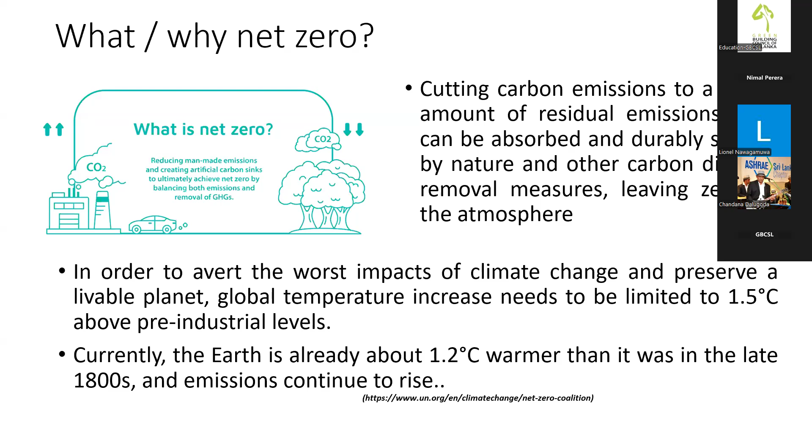That balanced condition is named net zero. Why are we talking about net zero? Because according to the Paris Agreement, related to the climate change sector, we can see the global temperature increase from the pre-industrial era, that is from 1850. The Paris Agreement hopes to limit the temperature increase to 1.5 degrees Celsius relevant to the pre-industrial era. But in 2024, we already passed that year, surpassing 1.6 degrees. That is a very dangerous part of this climate change.

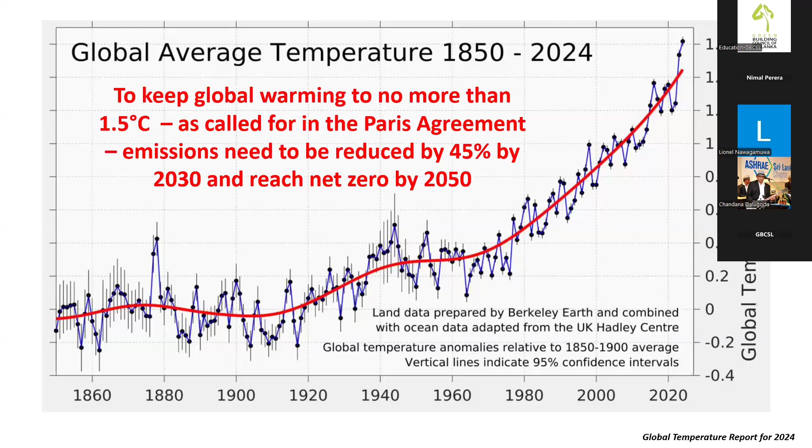Though we are talking about climate aspects, we are at a very detrimental point in terms of climate change, because the temperature around us has gone beyond the 1.5 pre-industrial era average limit. So we are still keeping some hope, especially on green hydrogen.

According to official figures, 2024 was the highest temperature ever recorded in the history of current civilization. According to my knowledge, in 2024 we were hearing that the highest temperature was recorded in 2023. Similarly, at the end of 2025, or maybe next year, we will hear the same thing - that 2025 was the highest temperature ever recorded. So the final thing is this is continuously increasing.

I'm trying to discuss a kind of solution for this, which is basically nothing other than green hydrogen. When you talk about hydrogen, I don't want to take much time explaining - hydrogen is the lightest atom in the periodic table, which we learn in O levels, A levels, and even lower classes. It was first recognized by Henry Cavendish in 1766 and so on.

There are so many stories behind hydrogen. When you talk about hydrogen, it has three isotopes, namely protium, deuterium, and tritium. Deuterium and tritium are isotopes of hydrogen, but we are very much keen on the one called protium.

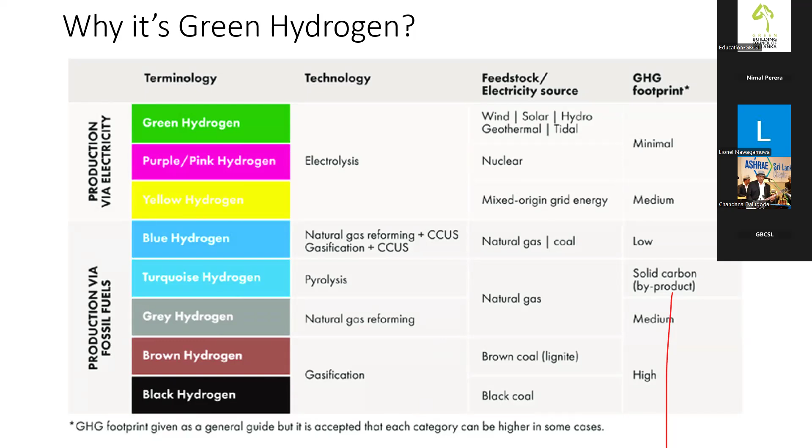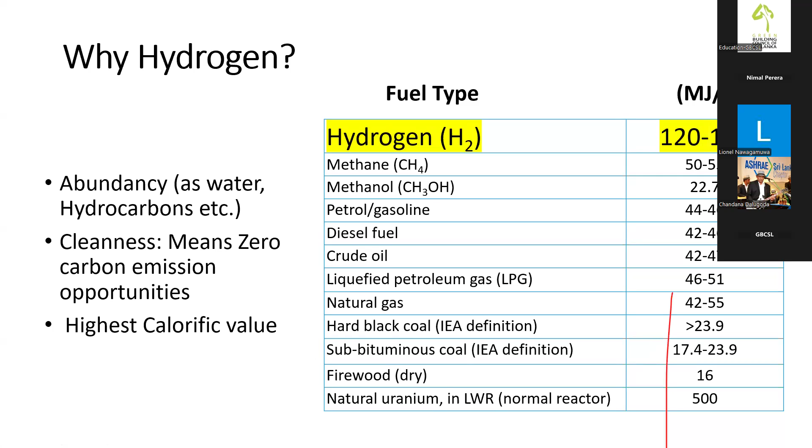So therefore, we can think about that particular hydrogen. If we can produce this hydrogen with minimal impact to the environment, that would be considered one of the best solutions.

All these fuel types have a lower energy calorific value than hydrogen. So that is one factor. On the other hand, green hydrogen is clean - it means zero carbon emission is happening if you burn this particular fuel.

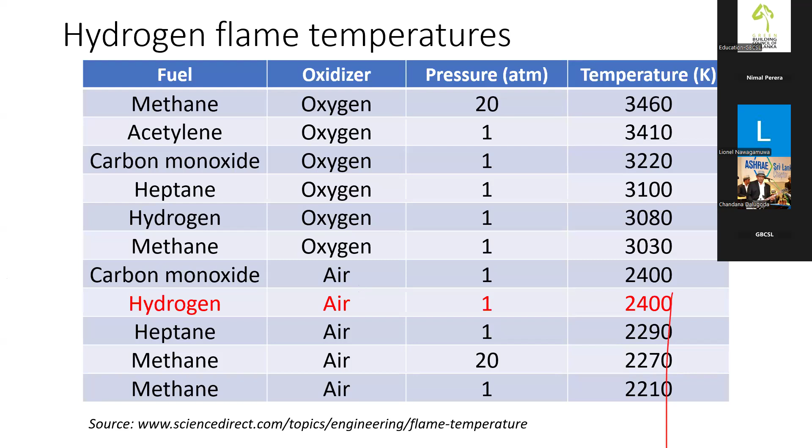It's the best source for our economic development. If you go through the historical evidences, you can remember we were using this in our school days, when we were children. We used to use caustic soda and aluminium foils to generate hydrogen, which is called chemical hydrogen, and fill it into balloons and float it. So that's what we know from history.

But other than that, there are several usages of this fuel. Currently, most spacecraft are using hydrogen, especially liquid hydrogen, as a fuel. In certain cases we are using it as a welding fuel, nitrogen fertilizer, food industry, and a wide spectrum of other usages we can discuss today, including the power sector.

We normally name hydrogen - it is not a source of energy, it is an energy vector, but you can use hydrogen for the purpose of energy storage. So that is a very important factor. Also, this hydrogen we can use as a fuel through direct combustion in direct combustion engines.

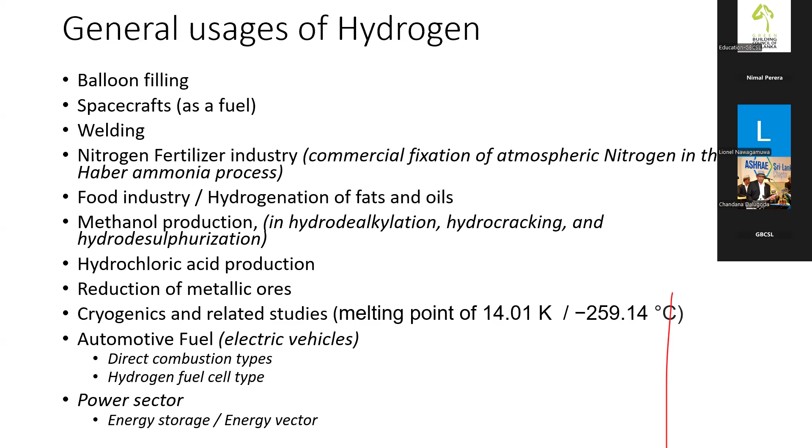So then, hydrogen, green hydrogen, and renewable energy are linked together, right? We can only produce green hydrogen with the supply of green energy or renewable energy. So that is the most important thing we always have to keep in mind.

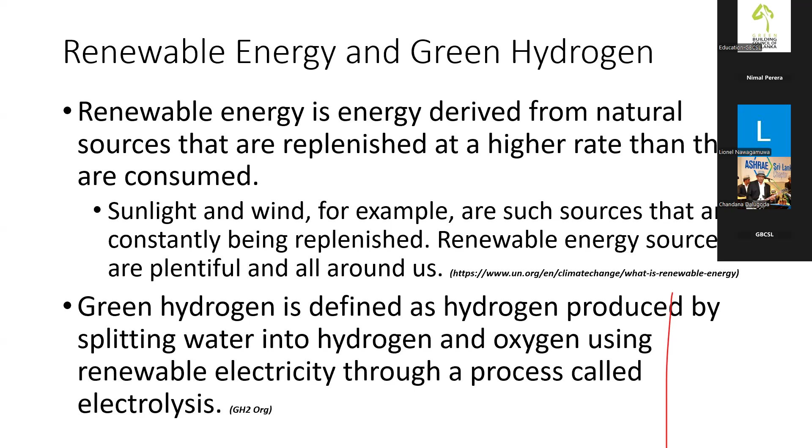Green hydrogen is defined as hydrogen produced by splitting water into hydrogen and oxygen using renewable electricity, through a process called electrolysis. So that's the most important definition about green hydrogen.

And of course, if you think about global carbon dioxide emissions, nearly about 74% of the emissions are coming from energy use in industry, or domestic, or transport sector - altogether there is a summation of 73.2%. Now, if we can make a mechanism to reduce this amount, to nullify this energy use and its resulting carbon dioxide emission - the main source of this energy sector responsible for this 73.2% energy use is fossil fuel, because we have to burn fossil fuels to use that energy.

So if we can find a mechanism to replace fossil fuels from this particular source of energy, definitely we can reduce this amount of emissions in the environment.

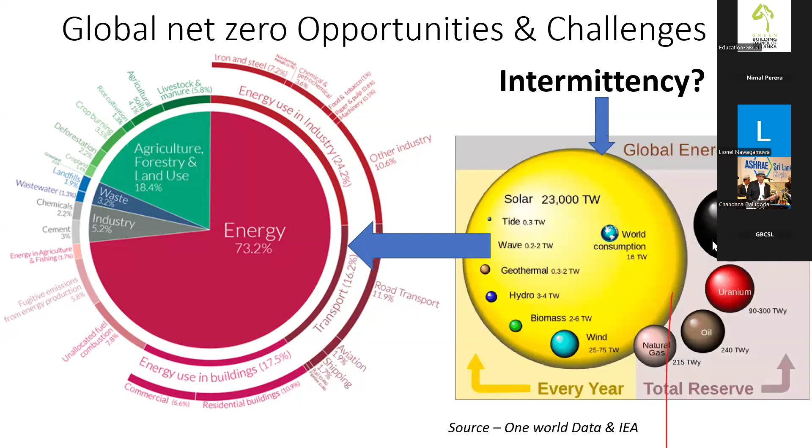Having that idea in our minds, we will think about the versatility of green hydrogen. But rather than green hydrogen, first we will think about green or grid renewable energy, because we are capturing renewable energy through solar or wind or other sources, and then feeding it to the national grid. The national grid can be connected to various industries, the transport sector, or the domestic sector, and we can use it only for electricity or power supply, if we have that scope.

But in the meantime, we are very seriously talking about renewable energy storage with batteries. Batteries - for what purpose can we use them? Maybe for transport, or grid balancing, or sometimes for very narrow purposes, but not very strong ones. Maybe as a backup source we can use these batteries. These batteries are charged with renewable energy.

On the other hand, we can think of the subject called pump storages. When there is an excess amount of renewable energy in the grid, we can use that excess energy to pump water from lower levels to upper levels, and grid balancing and storage can be done with these pump storages as well.

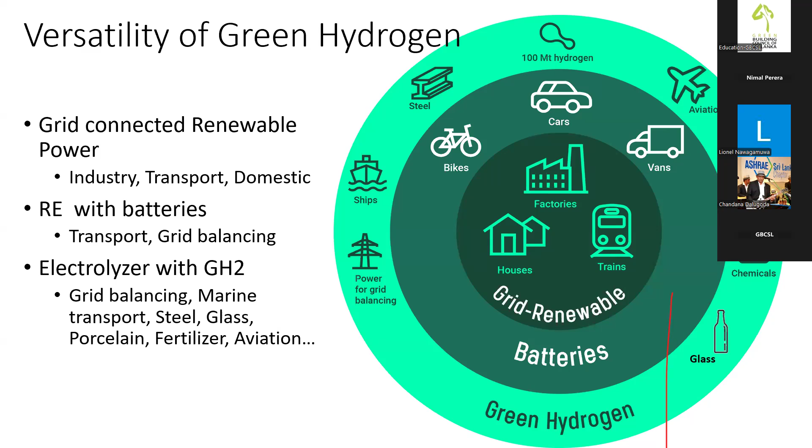But if we can apply this additional electricity through electrolysis, and generate green hydrogen, then we have a number of purposes like grid balancing, marine transport, steel production, glass production, porcelain, fertilizer, aviation, and likewise a number of processes we can address. So it's worthwhile to talk about green hydrogen, which is why I said this is a very versatile element.

Renewable energy is intermittent, as I mentioned earlier, with solar and wind power generation. I'm sure you remember the dark experiences we had in our country because of grid imbalance situations.

All these things could reasonably be addressed with this subject called green hydrogen generation. This variability can ultimately create frequency or voltage instabilities, grid congestion, and curtailment.

Sometimes we have to curtail the generation. That's why the utility sometimes says switch off all the rooftops, or the renewable power generation or solar power generation systems during a particular period.

So if we are ready with green hydrogen generation facilities and the electrolyzer system, we could definitely use this mechanism to generate green hydrogen. This could be used for further powering the nation, to generate power, and at the same time used for various other multi-purposes, which we can discuss in my next slides.

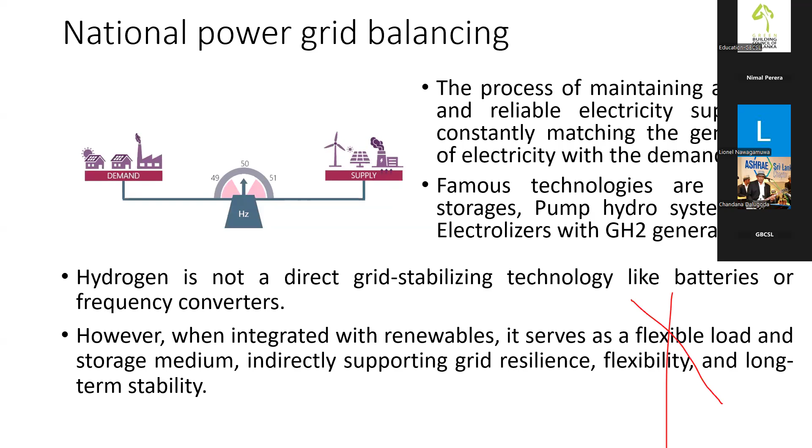National power grid balancing is normally the subject connected with electrolyzers, green hydrogen, and renewable energy, which I'm not going to elaborate on much more because I'm sure you have already received some understanding.

The real world application - somebody would ask me, are any other countries using this electrolysis mechanism and green hydrogen generation for the purpose of grid balancing? Yes, in fact I have already visited one of these places in Germany. I saw how they are balancing their grid at higher levels of renewable generation.

When there are higher levels of renewable additions to the national grid in Germany, especially in the northern side grids of Germany, they start their electrolyzers and generate green hydrogen. That green hydrogen they capture and mix with their natural gas grid or natural gas pipelines. With that, they increase the calorific value of this particular energy source, the thermal source, and they receive the benefit.

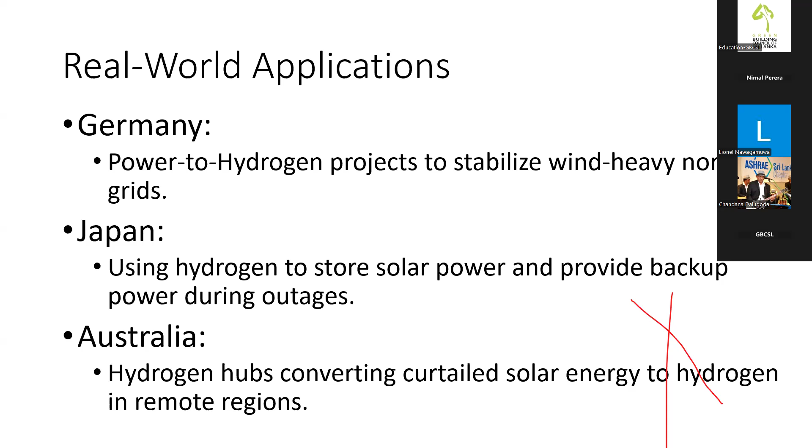These are very preliminary studies we have done so far, but the detailed studies have not yet been done. With detailed technical and economic studies, we can move ahead and decide where we are going to connect this grid balancing equipment for the electrolyzers.

But we have to consider the following aspects before going for implementation: the grid capacity - we need some idea whether the infrastructure can handle the additional loads from the electrolyzer, because connecting the electrolyzer may create additional loads. And of course we have to think about water availability, because water is one of the critical factors when we are talking about electrolysis.

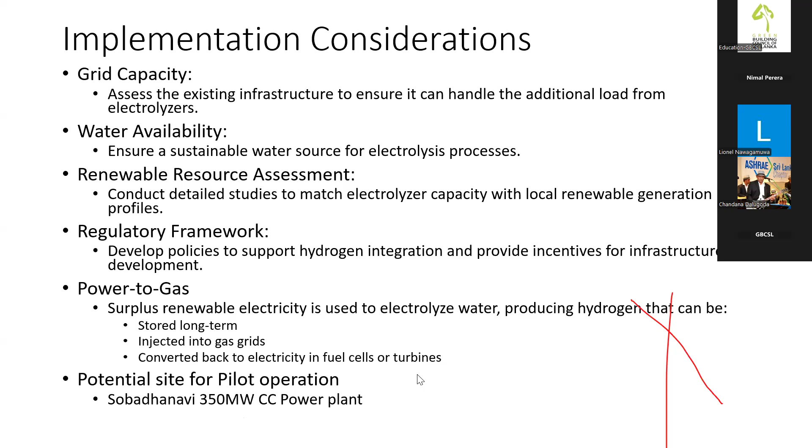For power to gas, surplus renewable electricity - where are we going to use it? Either we store it for a long time, since we don't have a natural gas grid, but hope at least by 2028 or 2030 we will have a limited natural gas grid. So are we going to mix this hydrogen into it, or convert it back to electricity using fuel cells or maybe turbines? The potential site for pilot operations is, of course, the Sobadhanavi 350 megawatt combined cycle power plant, which is available at the moment.

And then there's green hydrogen in the transport industry. There are two technologies we can think about: combustion technology or fuel cell technology. Fuel cell technology has a very long history. I remember in 2012 or 2013, I had the experience of traveling in a fuel cell operated bus in Korea. During that time, they were already doing research on this subject.

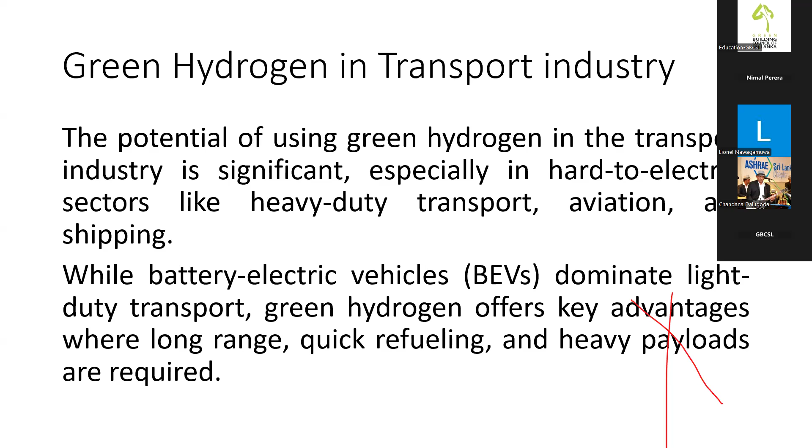What are the key transport sectors we can focus on, coupled with the high potential of green hydrogen? The heavy-duty transport sector definitely has assured opportunities to use green hydrogen - especially trucks, buses, and long-haul freight transport systems. Why are we so interested in hydrogen? Compared with battery technology, it has much faster refueling than battery electric vehicles, and the range is nearly 1,000 kilometers compared with battery technologies.

Also, if you compare the weight of a battery bank with a hydrogen storage tank, it's much lighter. In several countries like Hyundai in Europe, Toyota, and a number of other industries, they have already come to the scene with their technologies to use green hydrogen in their automotive systems. The two leading organizations are Hyundai and Toyota.

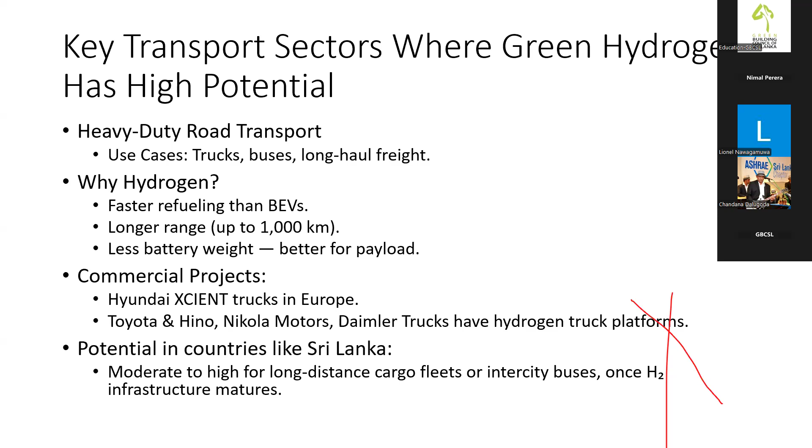And of course, trains are also very feasible. You may remember, a long time back in 2009 or so, one French company already introduced the train called Coradia iLint, a hydrogen powered train operating in Germany, France, and Italy. In Germany, the system has already stopped because of several reasons - one was cost, and the other was unavailability of the supply chain. But now they are again planning to bring the operation back with improvements to their supply chain, and quite rapidly.

You may remember when solar panels were first introduced to the market, they were very expensive, but now they are very cheap. Similarly, electrolyzers are also becoming much cheaper in the market rapidly. For Sri Lanka, the bus fleet could use hydrogen, especially in air polluted areas like Colombo.

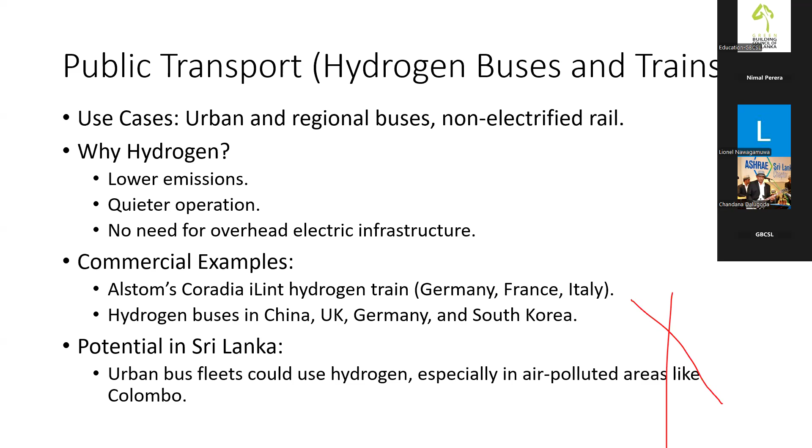This also has very high potential in maritime transport as well. A number of countries have already started pilot projects and some commercial operations. It's a very good source for, on one hand, economic mode of transport, and on the other hand, a very good source for decarbonization in the transport industry. In Japan especially, they have already started commercial projects with hydrogen-based maritime transport.

Even in Sri Lanka, we have a lot of opportunities, especially for hydrogen-powered harbor craft, tugs, or green ports. If we could convert our harbor operations to a green fleet of ships, or maritime equipment, what sort of green service could we offer to all the ships coming from various parts of the world, especially shipping fleets from the European side? They are very seriously looking for green supply systems to operate their maritime fleets. Therefore, we have a lot of opportunities in the maritime sector.

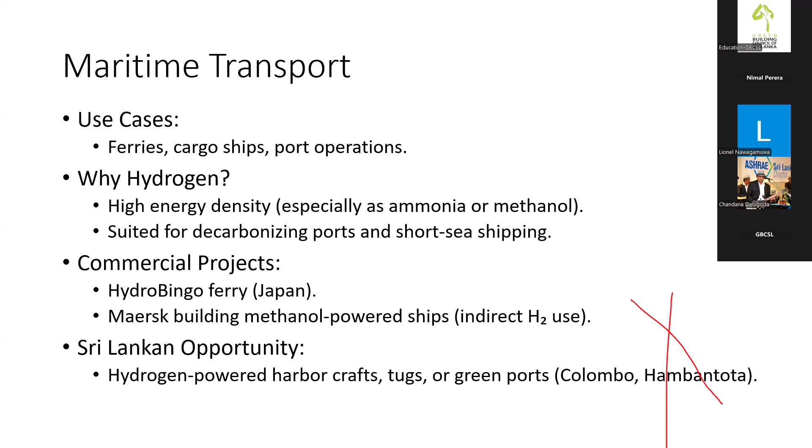Aviation, of course, mostly they are on the pilot stages, but the various aircraft operators are in the phase of pilot operations, and they will very soon start rolling their systems. Most likely by post 2030, there will be flights operating with green hydrogen.

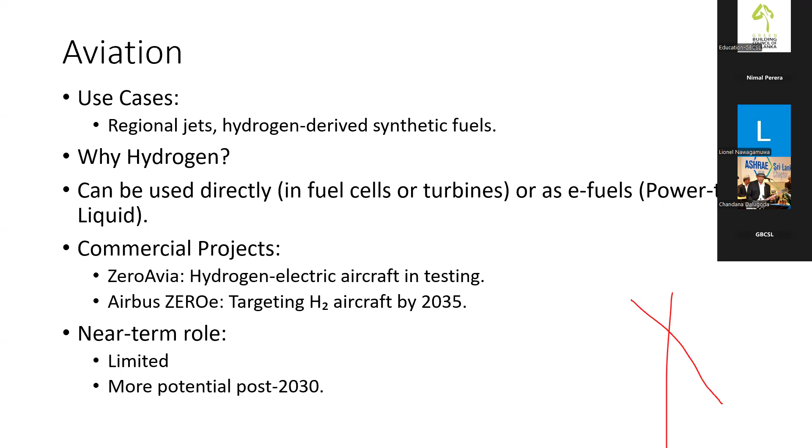So if you do a very simple technological comparison, hydrogen versus battery - the refueling time in hydrogen is in the range of minutes, but battery electric charging may be about hours. The range is between 1,000 kilometers and maybe 100 to 500 kilometers per charge. And the weight impact is very small in the case of hydrogen compared to the heavy battery pack weight in battery electric equipment.

The infrastructure is emerging, especially for hydrogen. It's in the pipeline, but most of the infrastructure for battery electrics is already developed. Though it is not very much available in Sri Lanka, in other countries it's available.

The efficiency is nearly 40 to 60% in the case of hydrogen through fuel cell operation. Battery electric will be 80 to 90%. But now slowly and steadily, this efficiency is improving in the hydrogen sector as well.

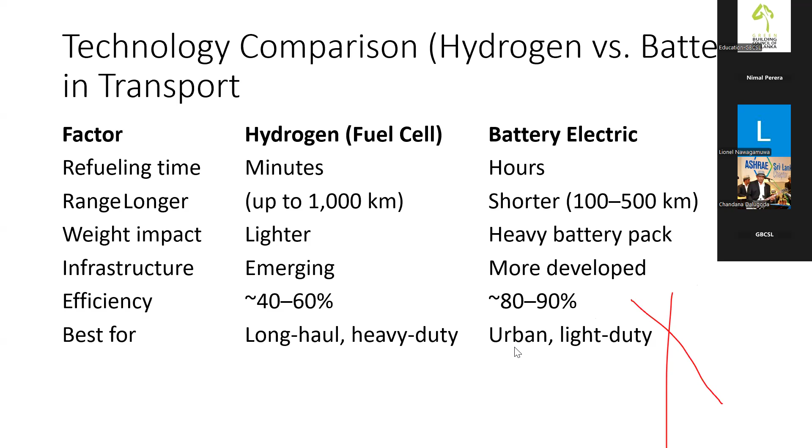Especially hydrogen systems are very suitable for long hauling or heavy duty, and battery electrics are better for urban and light duty automobiles or vehicles.

What are the potentials for Sri Lanka? Of course, in long distance trucks like container carriers, the potential is very high. So the condition is we need hydrogen stations. We have to start promoting the generation of green hydrogen and also establishing hydrogen supply stations at least next to the main corridors.

Intercity public buses, the potential is very high with hydrogen. But for three-wheelers or tuk-tuks or taxis, the potential is very low. So battery electric vehicles are best for the small vehicles like two-wheelers or three-wheelers.

Shipping - handling from the ports has medium potential. Rail has low to medium potential. And aviation, of course, is a long-term story which we have to study over a long period.

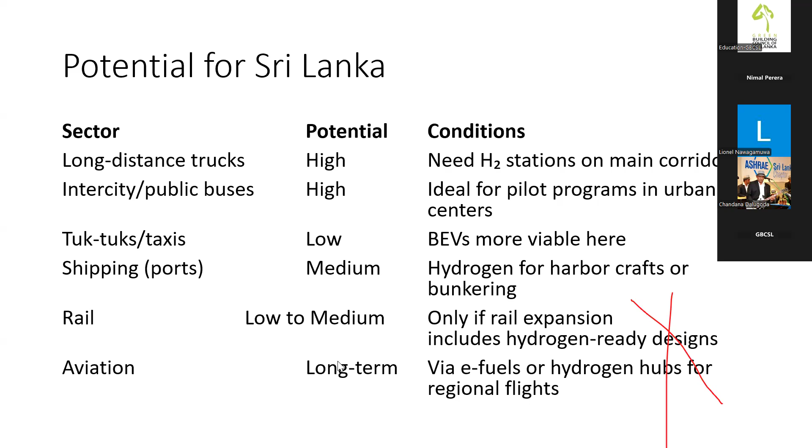And of course, we were dreaming about this railway electrification for a number of years - from 1970, according to my mind, we are planning to go for railway electrification. But still, we have not developed at least 1 kilometer, or even 1 meter, of electrified railway.

So during the electrification process, we have to consider two areas. We have two potentials, either overhead electrification or the application of a third rail, as given in the right-hand diagram, the picture. But both cases - the first one is a little bit costly for Sri Lanka, and the other one is basically not very socially friendly.

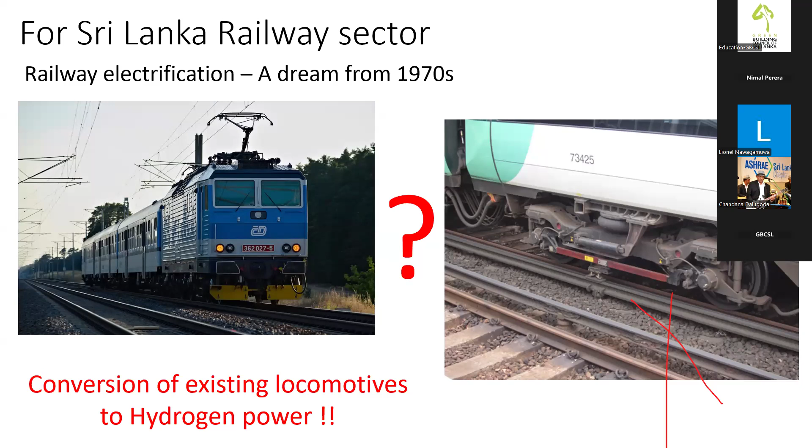So it's worth launching an R&D process to convert at least existing locomotives to hydrogen power. It's a good area which we can think about.

Metal industry, like steel production. Though we don't have primary steel production from iron ore to steel here, we have secondary metal processing or steel processing, which we can think about as a source of heat - we can think about hydrogen.

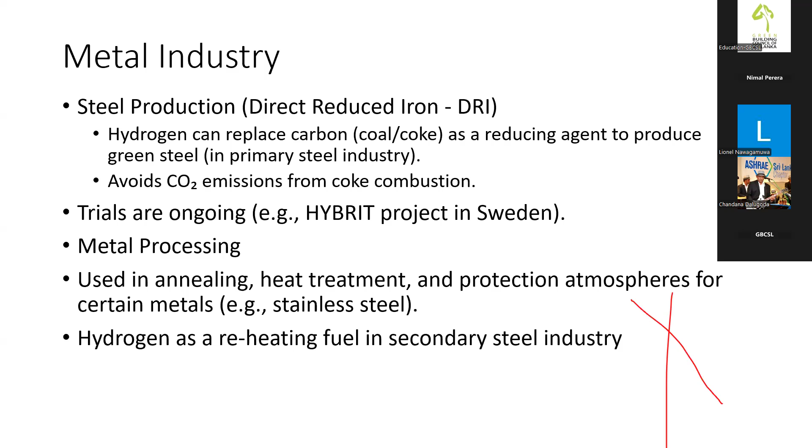And then there are proven operations in the world, in Sweden and also in Germany. They have already come up with proven results to produce steel with green hydrogen.

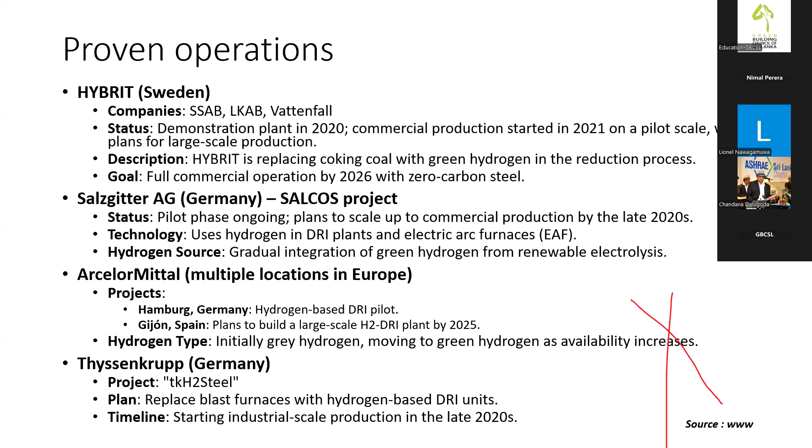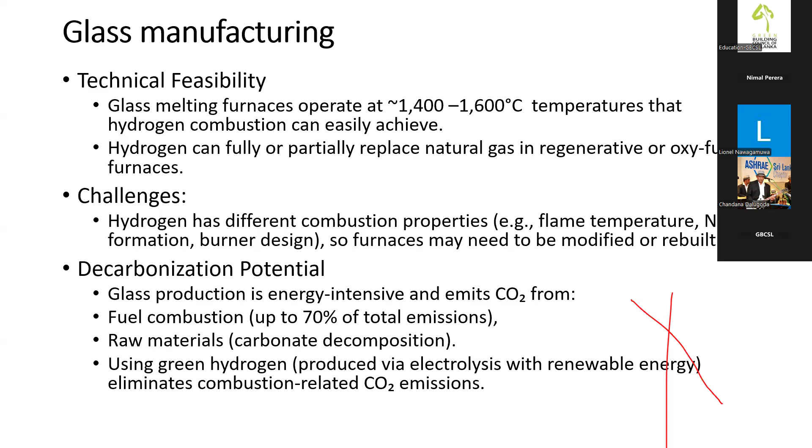According to the information, vodka bottle manufacturers have already converted their system - not the liquid or the alcohol, but the glass bottle - they are producing using green hydrogen.

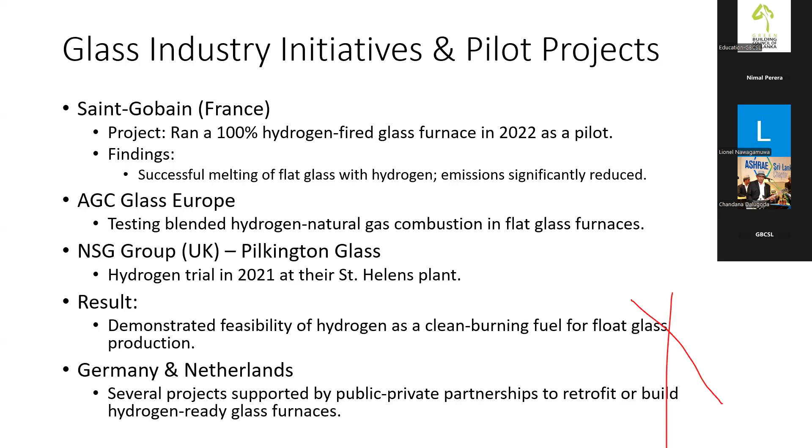There are certain technical considerations like flame temperatures. Of course, when you burn hydrogen, it will automatically generate NOx emissions because of the high temperature combustion. The energy density of green hydrogen has to be taken into account because it has lower energy by volume, which may require more fuel inputs to improve the burners. So in these cases, whether glass, steel, or whatever the commodity, you have to take special precautions and do research and development before getting into this operation.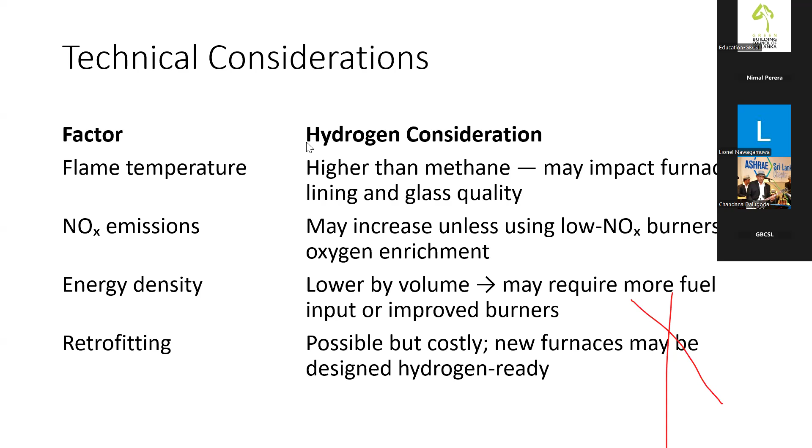There's the redesigning of the gas burners used in current industries. So when you're retrofitting from one to the other, especially retrofitting from fossil fuels, we have to be very careful. We have to think about the furnace lining also, because of the temperature and other changes.

Cement industry is also another area which we can think about, which needs a certain level of R&D. These are the best R&Ds where students can undertake lab scale work, with the possibility of extending to commercial scale production in the country.

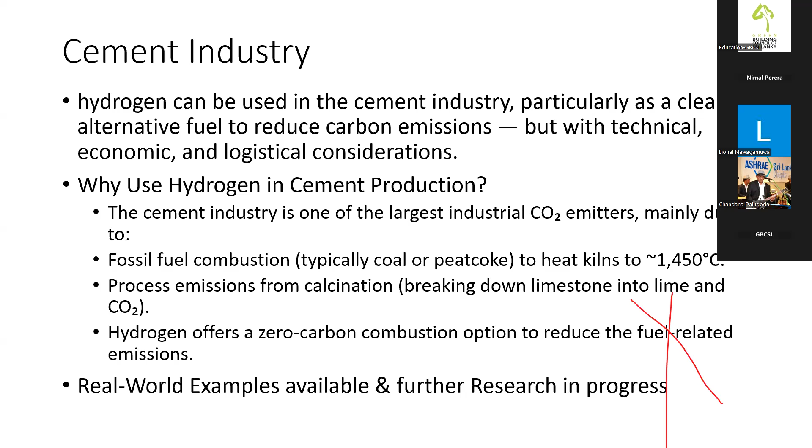In the cement industry, there are possibilities. If we can think about green cement in the future, that will be the best opportunity for Sri Lanka. Sri Lanka's cement industry could explore hydrogen to reduce dependence on imported fossil fuels, because currently we are heavily depending on fossil fuels - we have only one composite cement factory in Sri Lanka currently. If that one, operating on coal, can switch from coal to green hydrogen, that will be a great achievement, aligned with green industrial development and carbon market mechanisms, with added benefits.

We can integrate with renewable energy growth, especially solar and electrolysis for local hydrogen production, rather than centralized. If we can think about localized or decentralized hydrogen production, that's also one area to consider - positioning for green cement, as I've already explained. If we can think about green cement with green buildings, that would be a top advantage for the country.

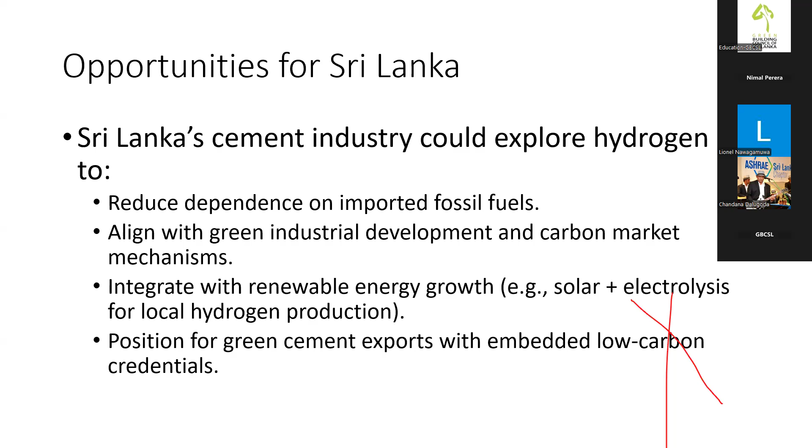The porcelain, ceramic, and tile industry also heavily depends on fossil fuels. They use huge amounts of fossil fuel because they have to achieve temperatures of sometimes 1200 or 1,400 degrees Celsius, where they currently mostly obtain heat from fossil fuels like LPG, kerosene, or industrial diesel.

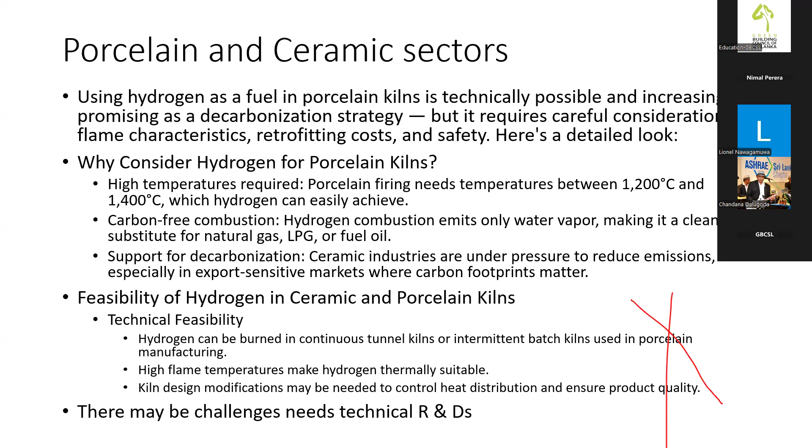So if those kilns and high temperature furnaces can switch to hydrogen, or at least start from the blending level rather than just retrofitting from A to B, why can't we think about starting with small percentages of blending with green hydrogen, then slowly increasing the blended percentage, which will have substantial benefits in decarbonizing as well as economic benefit. But of course, we have to get the green hydrogen supply chains ready before jumping into these technologies.

As I mentioned, Sri Lanka has a very significant export industry benefiting from this particular sector. I have been to a number of porcelain industries in Sri Lanka - they are suffering mainly because of heavy fuel costs, as well as export barriers, sometimes facing issues in their marketing and supply chains because of the brown nature of these products.

Because they use huge amounts of fossil fuels, the carbon footprint connected with these products is already very high. If we can start thinking very seriously on this subject - retrofitting or partial replacement of fossil fuel with green hydrogen - because green hydrogen production's main raw material, the feedstock, is basically renewable energy, which is amply available in our country. The only thing is we have to plan it very well - where we generate it, how we collect it, how we store it, how we distribute it, and where to use this valuable commodity.

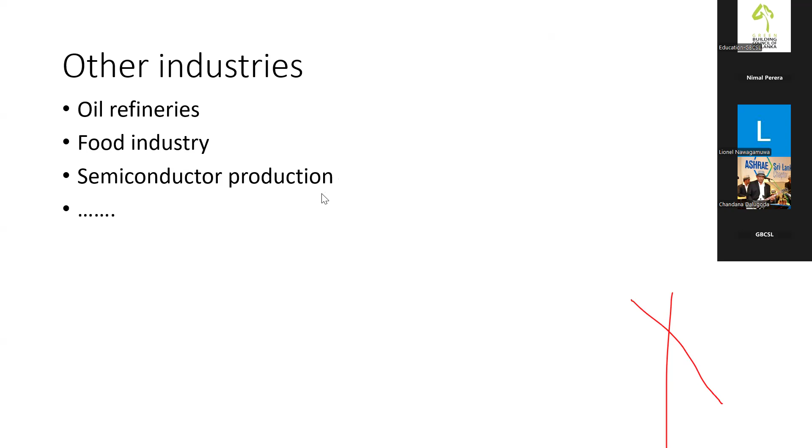In the meantime, we can plan for a set of microgrids, either on-grid or off-grid. With the input of water, we can split the water and deliver hydrogen. We can think about exporting hydrogen, or derivatives of hydrogen like ammonia, to the region or to the world.

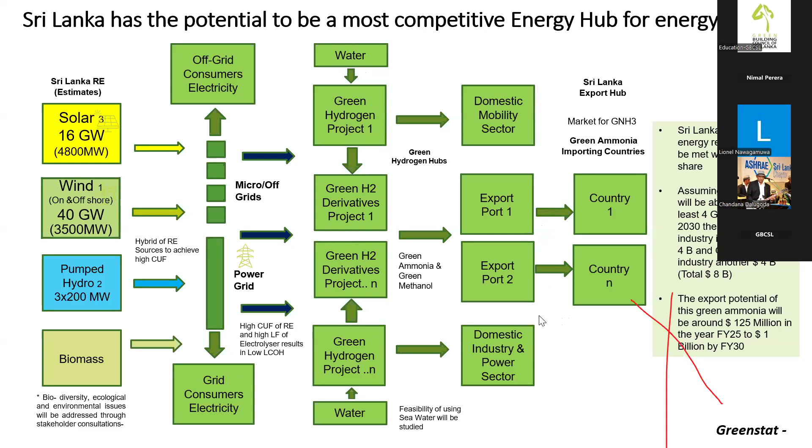But the challenges are still not planned for. At least we don't have a green hydrogen policy in the country, according to the information I've heard. It's already been prepared and is in the draft stage.

Once, while I was talking about green hydrogen, one young fellow told me, sir, the world is now talking very seriously about green hydrogen. Countries around us, like India, Pakistan, and Bangladesh, are talking about green hydrogen very seriously. But still, we couldn't bring a source of natural gas to the country to operate our power plants at low cost. Since 2006 we've been talking about natural gas, but still we couldn't make it a reality.

Green hydrogen depends on electrolysis and renewable energy. The technology is available, and water is available, though with certain purification needs. Distribution and refueling infrastructure still needs to be developed.

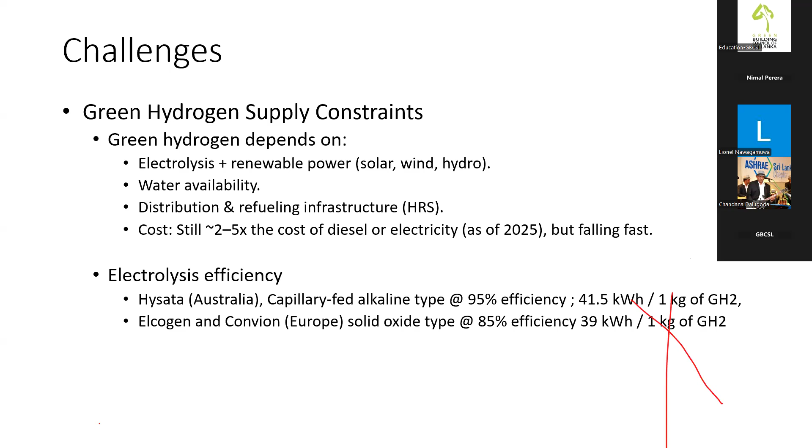In the meantime, electrolysis efficiency was a kind of challenge in the past, but now even 95% efficiency is available. To produce 1 kilogram of green hydrogen at 95% efficiency, we only have to provide 41.5 kilowatt hours. So that level of efficiency is now available even at the commercial level.

Countries like China, Saudi Arabia, Germany, India, Australia, USA, United Kingdom, France, Netherlands, and Spain are the top leaders of this green hydrogen race.

Sri Lanka's 2023 National Green Hydrogen Roadmap outlines a strategic vision to leverage its vast renewable energy resources, including offshore wind and solar, to establish a green hydrogen economy. This was done with the support of the Norwegian government and the Norwegian organization called GreenStat. The roadmap emphasized the dual objectives of achieving energy security and becoming a regional hub.

This is part of the GreenStat and Sri Lankan national collaboration. Let me highlight a few essential extracts of the Sri Lanka Hydrogen 2030 roadmap: creation of 4,000 jobs and earning nearly 500 million from exports related to the green energy value chain.

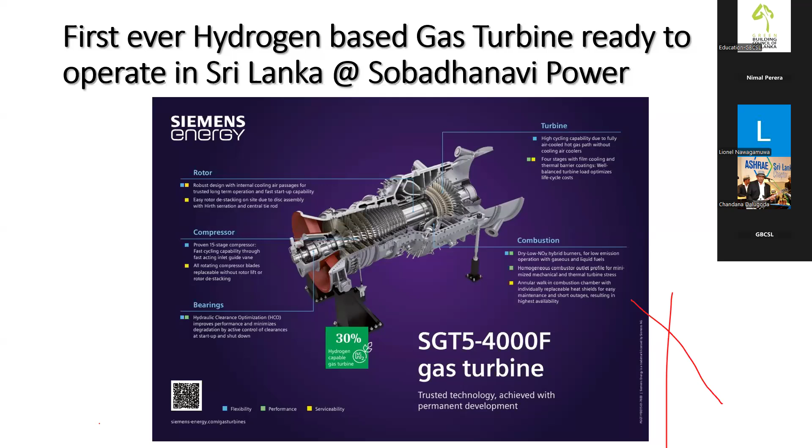In the meantime, if we start producing green hydrogen in the country at different levels, both will be available. At least we can partially green the electricity in the grid with this particular equipment.

I would like to end my presentation with an extract from Jules Verne's Mysterious Island, written in 1874. He wrote: 'I believe that water will one day be employed as a fuel. Water will be the coal of the future.' This idea was expressed in 1874, nearly 150 years ago, showing Jules Verne's visionary grasp of science and energy possibilities. Thank you very much for listening.